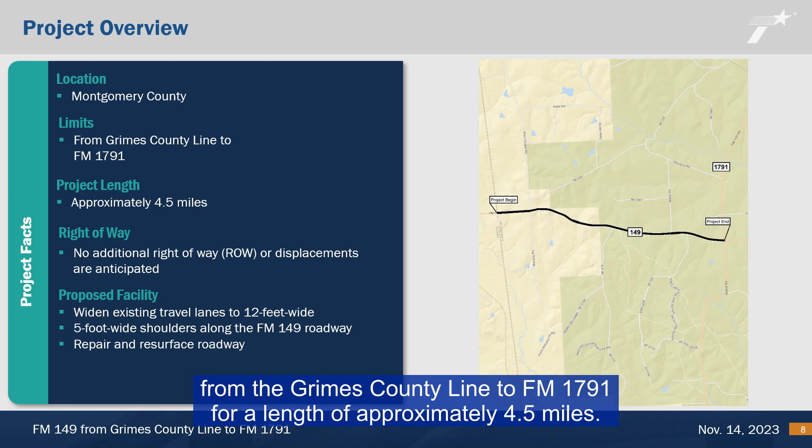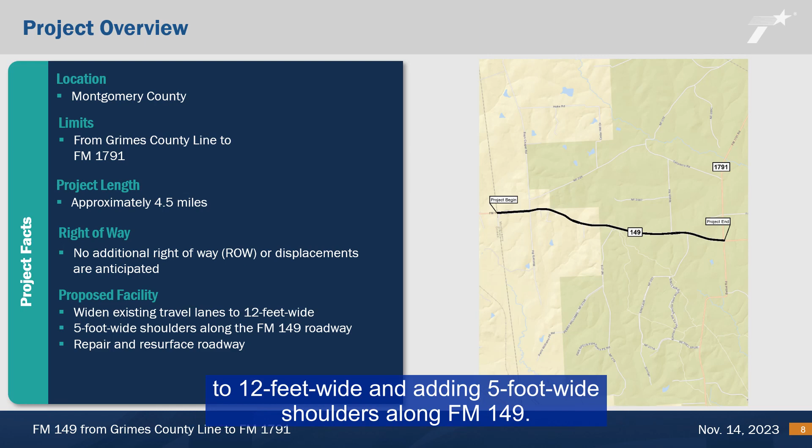The proposed project limits extend from the Grimes County line to FM 1791 for a length of approximately 4.5 miles. The project is located in Montgomery County. Proposed improvements include widening the existing travel lanes from 10 feet wide to 12 feet wide and adding 5-foot wide shoulders along FM 149. The roadway would also be repaired and resurfaced.

On September 27, 1948, the United States Forest Service granted a special use permit to TxDOT. This special use permit is a legal document that allows TxDOT authorization for a specific use of the specified land for an agreed upon amount of time. With the granted special use permit, the United States Forest Service allowed TxDOT to construct FM 149 through the Sam Houston National Forest.

Coordination between the National Forests and Grasslands of Texas and TxDOT began in December 2022 to discuss who would be the lead federal agency for the NEPA clearance of the proposed improvements to FM 149. In May of 2023, TxDOT coordinated with the FHWA and the NFGT to lay out the procedure for the FHWA to issue the letter of consent to the NFGT for the conversion of the SUP to a DOT easement.

To recognize TxDOT as the lead federal agency, and so this project could continue under a TxDOT CE, it was agreed to by the FHWA and NFGT that TxDOT would issue a notice of intent to the NFGT signifying their intent to have the FHWA issue a letter of consent to the NFGT for the conversion of the SUP to a DOT easement. The letter of intent was sent to the NFGT on October 18, 2023.

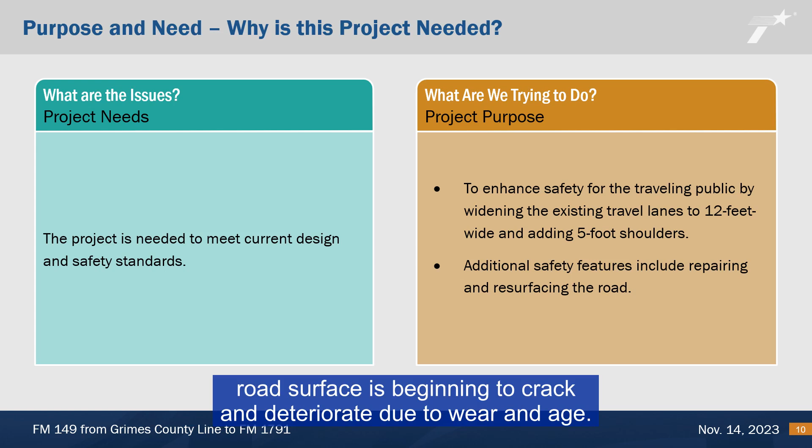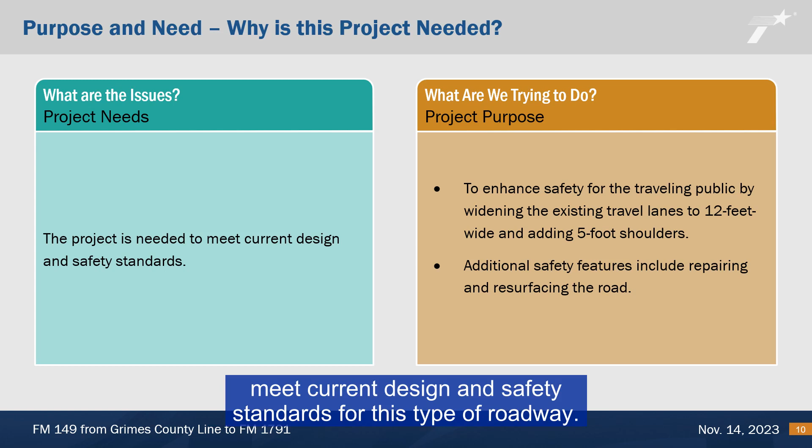The project is needed because the existing road surface is beginning to crack and deteriorate due to wear and age. Additionally, the existing 10-foot wide lanes and the lack of shoulders do not meet current design and safety standards for this type of roadway. The purpose of this project is to address aging infrastructure and to meet current design and safety standards.

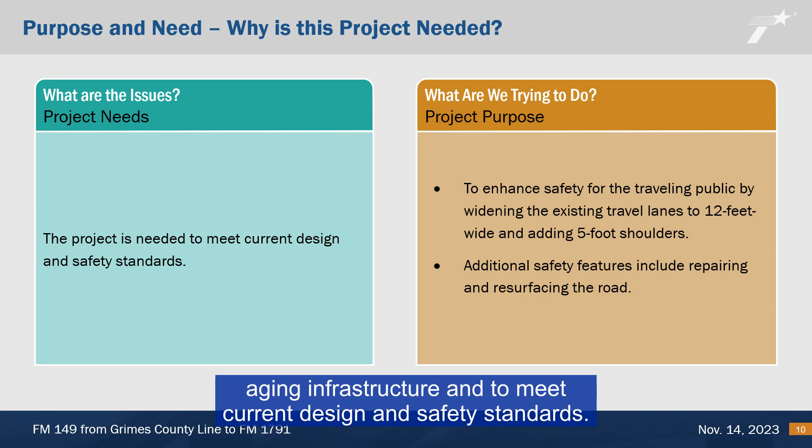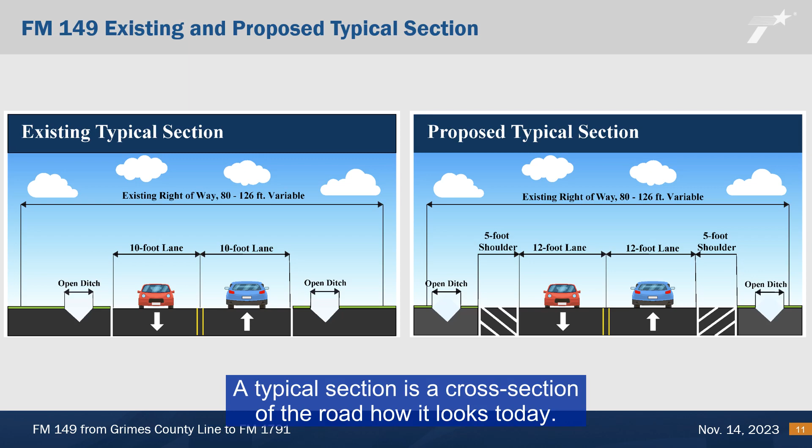Now let's walk through the proposed improvements. This slide includes an illustration of the existing typical section of the roadway. A typical section is a cross-section of the road, how it looks today.

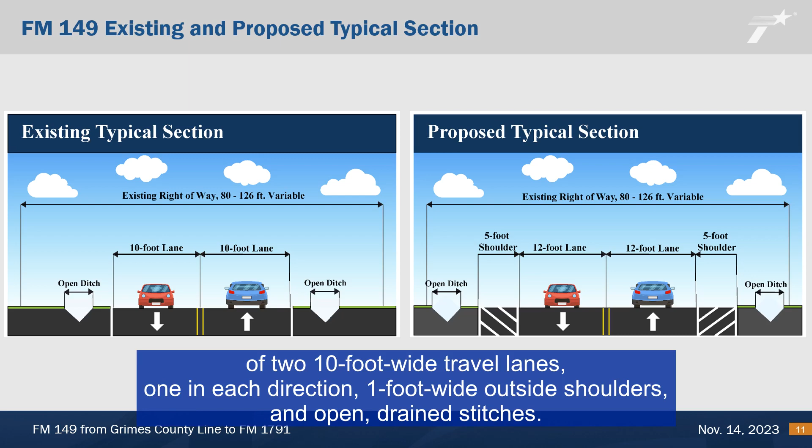Within the project limits, the existing FM 149 roadway consists of two 10-foot wide travel lanes, one in each direction, 1 foot wide outside shoulders, and open drainage ditches. The existing right-of-way is variable and is approximately 80 to 126 feet wide. There are no sidewalks or bicycle accommodations within the existing project area.

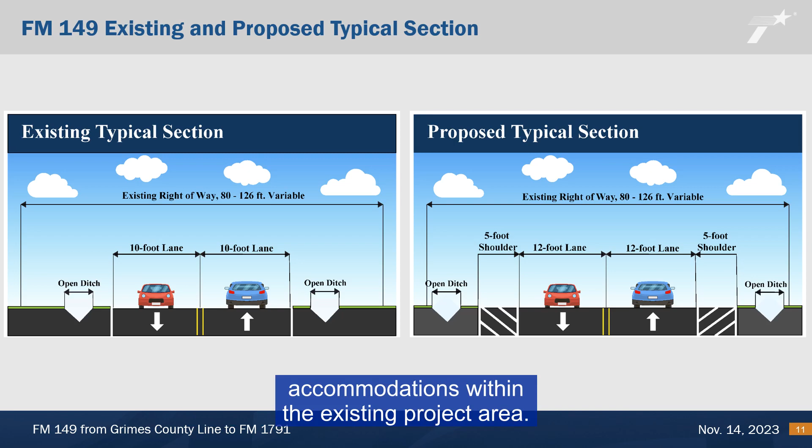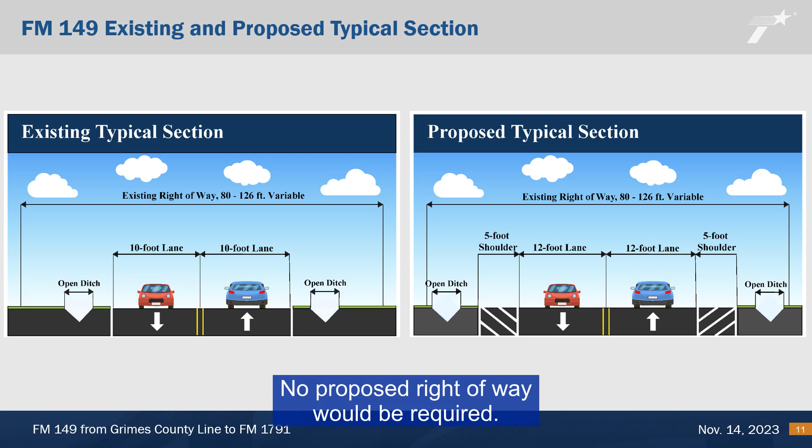The proposed project would widen the existing travel lanes to 12 feet wide and provide 5-foot wide shoulders on both sides of the roadway. No proposed right-of-way would be required.

The drainage analysis showed a need to widen and deepen the existing roadside ditches to accommodate the additional sheet flow from the widened roadway, which would result in the proposed removal of trees. The improvements to the cross culverts due to the required traffic controls and the roadway widening would also require the removal of trees. Approximately 6 acres of trees would be removed from sections of existing right-of-way.

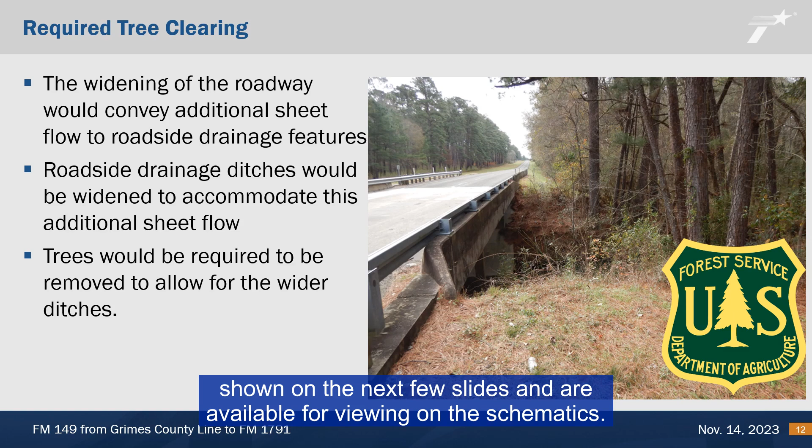Tree removal efforts would be coordinated with the United States Forest Service. The tree removal areas and acreage of trees to be removed from each area are shown on the next few slides and are available for viewing on the schematics.

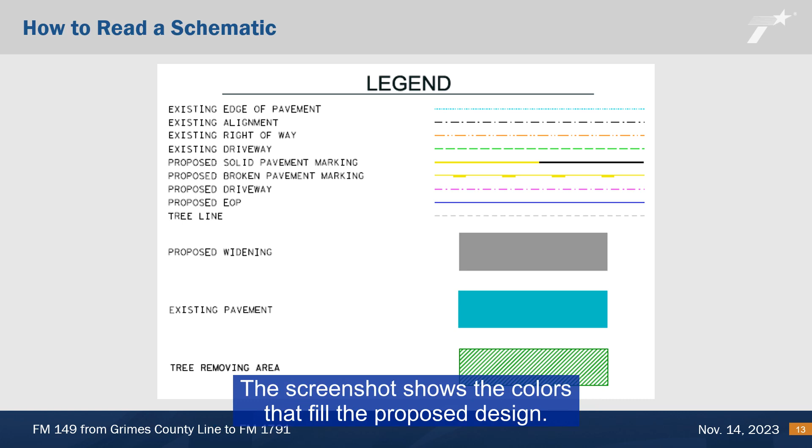Here is a screenshot of the legend on the schematics that you can find on the website. The legend is included on each page of the schematics so you can reference it as you review them. The screenshot shows the colors that fill the proposed design. These colors identify the limits and major aspects of the project.

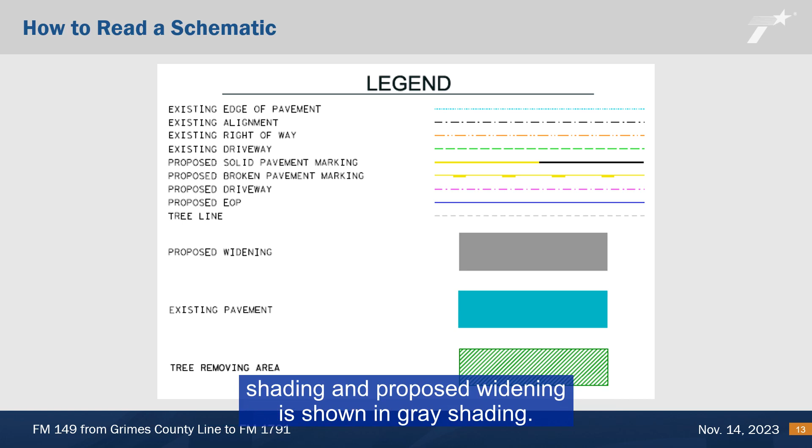Let's walk through them. The existing right-of-way is shown as an orange dashed line. The existing pavement is shown in blue shading, and proposed widening is shown in gray shading. Proposed tree removal areas are shown in green crosshatch.

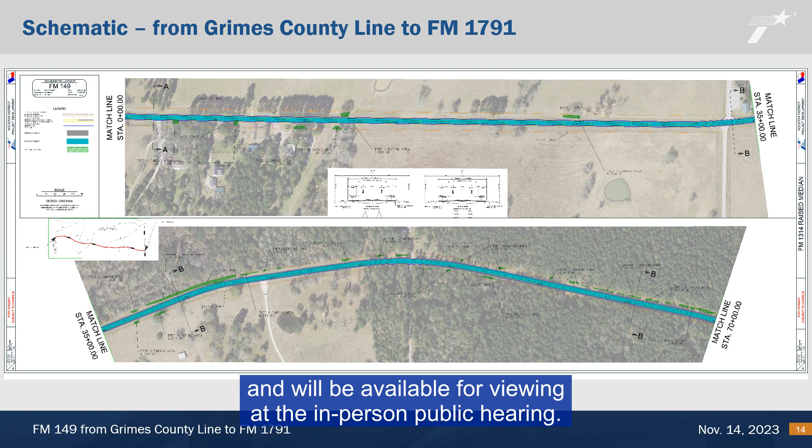Here's a detailed look at a portion of the schematic or design drawing of the project. This slide shows FM 149 at the Grimes County line. A full version of the project schematic can be downloaded from the project website and will be available for viewing at the in-person public hearing.

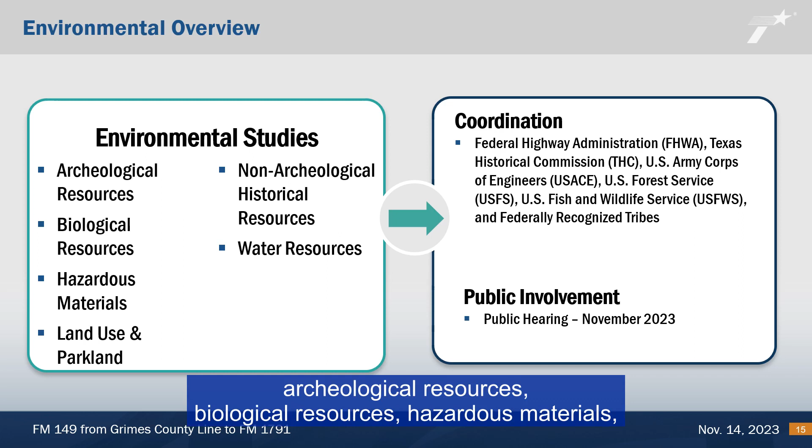The project team is evaluating the potential environmental impacts that could occur as a result of constructing the proposed project. Areas that are under review include archaeological resources, biological resources, hazardous materials, land use and parkland, non-archaeological historic resources, and water resources. The project would be designed to avoid or minimize impacts to the greatest amount practicable. Technical reports documenting the analysis and conclusion of these studies are available on the TxDOT webpage, but let's walk through the findings.

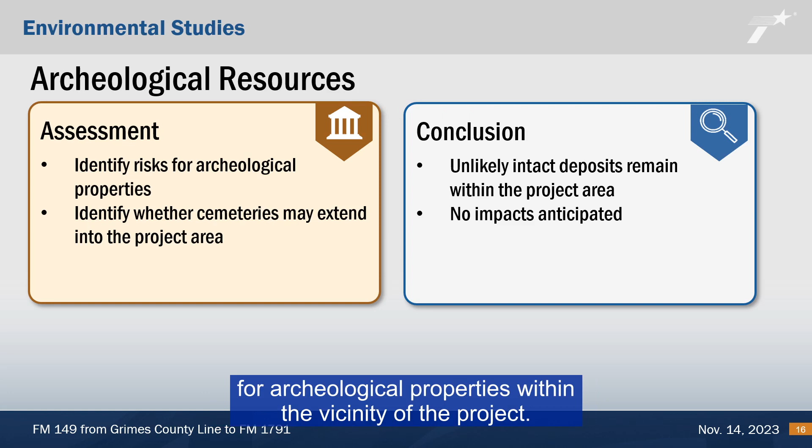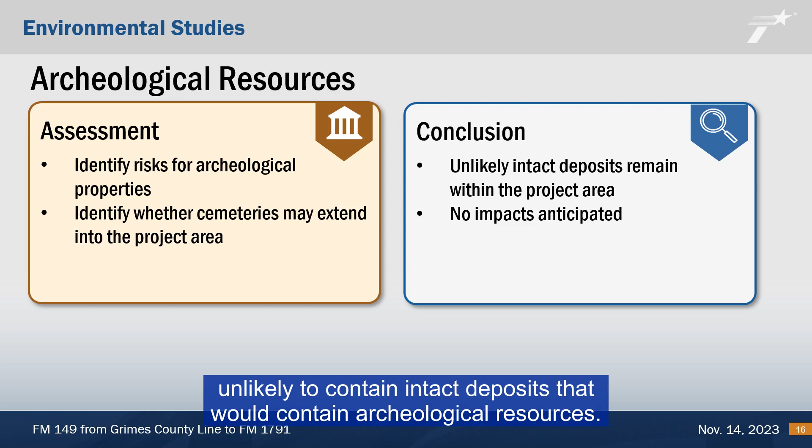An archaeological background study and survey was completed for the proposed project. The purpose of a background study is to identify risks for archaeological properties within the vicinity of the project, and to consider whether any cemeteries may extend into the project area. The study and survey found the area unlikely to contain intact deposits that would contain archaeological resources. Therefore, no impacts are anticipated and no further archaeological investigations are warranted prior to construction activities.

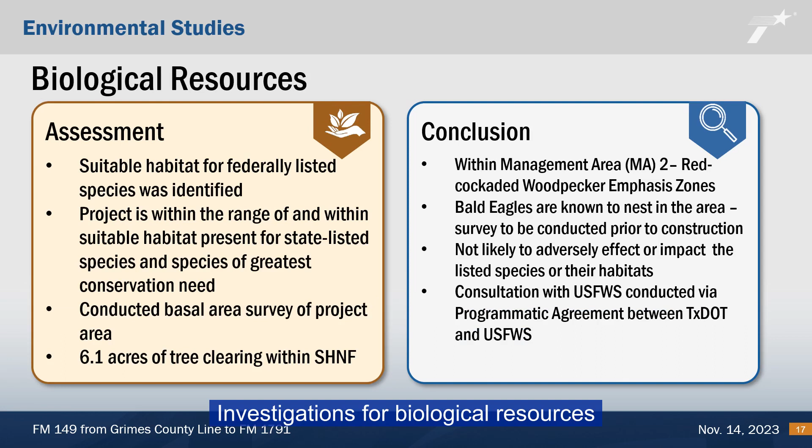Investigations for biological resources were conducted within the project corridor. Biological resources studies include evaluating potential impacts to vegetation, wildlife habitat, and threatened and endangered species. The project area contains habitat for federally listed species and is within range of and within suitable habitat for state-listed species and species of greatest conservation need. The project falls within Management Area MA2 for endangered red cockaded woodpecker emphasis zones.

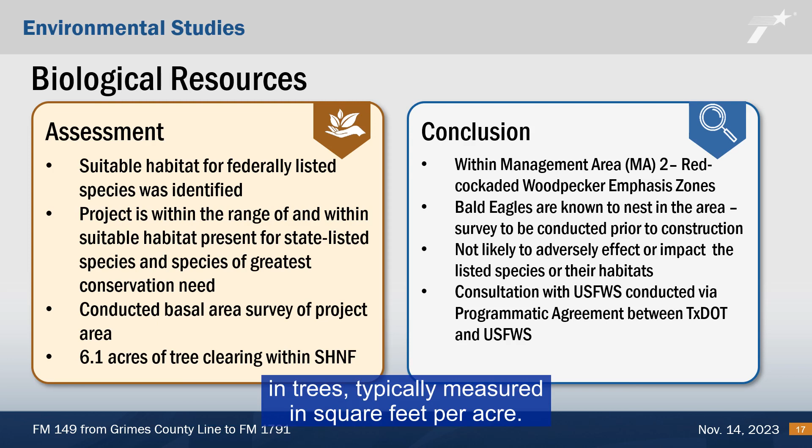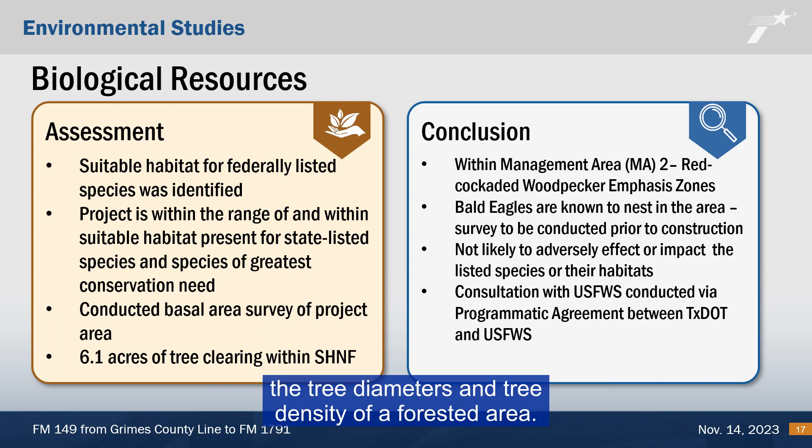Based on the current project design, approximately 6.1 acres of tree clearing within the existing right-of-way would be required during construction. Therefore, TxDOT conducted a basal area survey of the proposed project. The basal area gives us an overall picture of how much of an area is covered in trees, typically measured in square feet per acre. This measurement is an important tool for wildlife managers as it provides the tree diameters and tree density of a forested area.

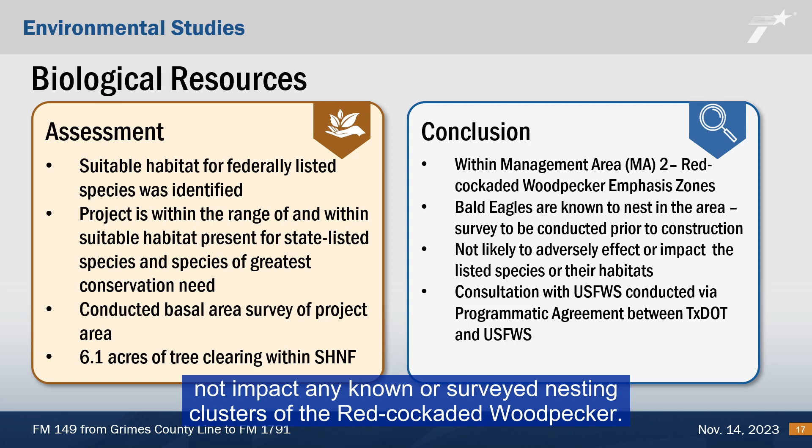Determining the basal area helps us make decisions when managing forests for wildlife that may have specific habitat requirements. The removal of approximately 6 acres of trees along the edge of FM 149 would not impact any known or surveyed nesting clusters of the red cockaded woodpecker. Additionally, the results of the basal area survey concluded that the appropriate density of trees would remain to support the breeding and foraging needs of the species.

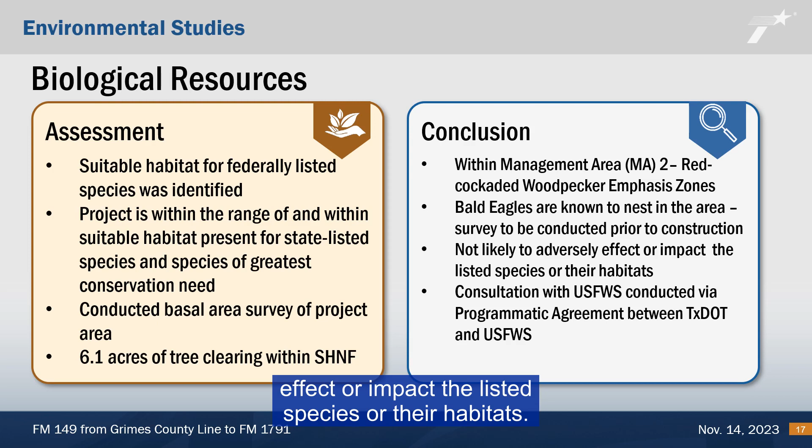Bald eagles are also known to nest in the area. A survey for bald eagles and their nests will be conducted prior to construction. A presence-absence survey conducted on December 8, 2022 found no bald eagle nests in any of the trees anticipated to be removed as a result of this project. The project is not likely to adversely affect or impact the listed species or their habitats. Consultation with the U.S. Fish and Wildlife Service is being conducted via the programmatic agreement between TxDOT and the United States Fish and Wildlife Service.

A hazardous materials initial site assessment was completed to determine the potential for encountering hazardous substances and/or contamination within the vicinity of the proposed project. There are several buried pipelines that intersect the project area. Identification and relocation of pipelines as needed would be addressed during the utility relocation phase of the project in accordance with established procedures.

The proposed FM 149 project area is located adjacent to large parcels of undeveloped piney woods forest and includes some residential areas. A portion of the project is located within the Sam Houston National Forest, which is classified as a publicly owned recreation area and is therefore protected under Section 4(f) of the Department of Transportation Act of 1966 and under Chapter 26 of the Texas Parks and Wildlife Code. Under these regulations, TxDOT must coordinate with the official with jurisdiction, which in this case is the U.S. Forest Service, to determine if the proposed project would adversely affect the activities, features, or attributes qualifying the recreation area for protection under Section 4(f).

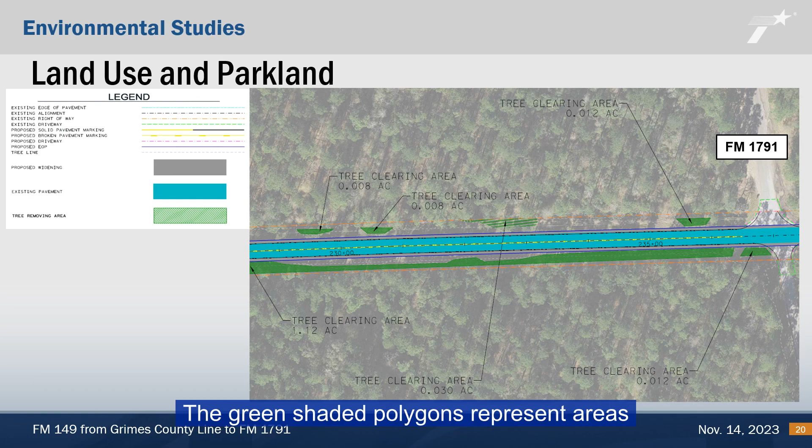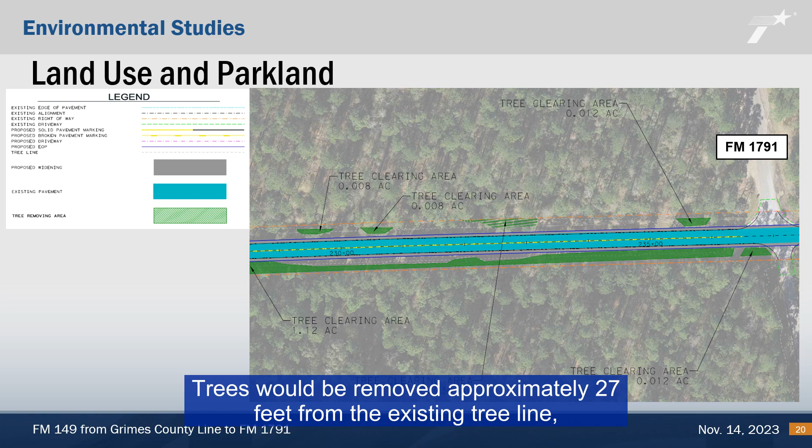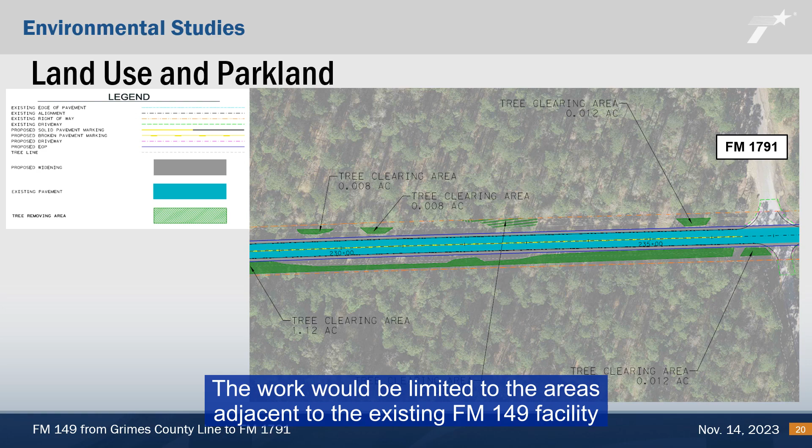This image illustrates a portion of FM 149 near FM 1791. The green shaded polygons represent areas of required tree clearing within the existing special use permit area. Trees would be removed approximately 27 feet from the existing tree line, accounting for a total of approximately 6.1 acres. The work would be limited to the areas adjacent to the existing FM 149 facility and remain within the special use permit area granted to TxDOT.

No historic age resources constructed prior to 1978 were identified in the study area. No districts or properties are recommended eligible for listing in the National Register of Historic Places as a result of historic resources surveys.

8 streams and 1 potential wetland were identified within the project corridor. The proposed project work is anticipated to be covered under a U.S. Army Corps of Engineers Nationwide Permit 14 with pre-construction notification.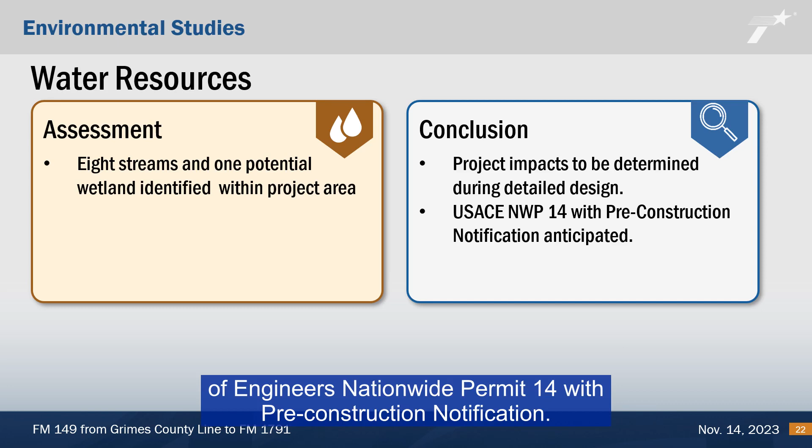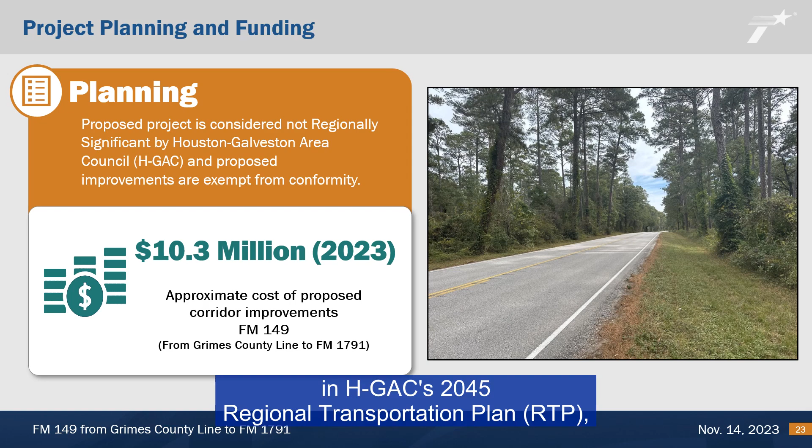The proposed project is federally funded as a maintenance-type project to improve the existing roadway. The proposed improvements are exempt from conformity, and the project is considered not regionally significant by the Houston-Galveston Area Council, HGAC. Therefore, this project is not listed in HGAC's 2045 Regional Transportation Plan, RTP, and the 2023 through 2026 Statewide Transportation Improvement Program, STIP. The approximate cost of proposed improvements is $10.3 million.

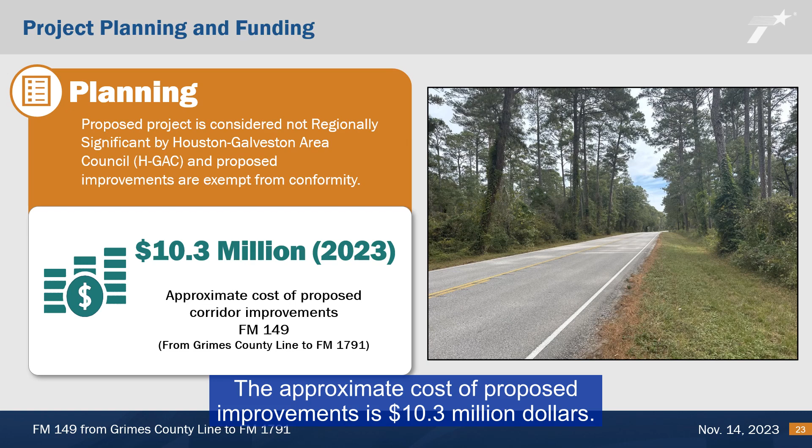No additional right-of-way would be required for the proposed project. No potential impacts to residential or commercial properties are anticipated. The FM 149 roadway is currently under a special use permit granted to TxDOT from the U.S. Forest Service. TxDOT is currently working to convert the special use permit to a Department of Transportation easement prior to construction.

This public hearing is being held to present the proposed project, including the proposed design and the associated environmental technical reports, and to gather public and stakeholder input. After the comment period closes, the project team will review the comments received, make appropriate design modifications, and prepare the public hearing documentation. The public hearing documentation will be posted to the project webpage when prepared.

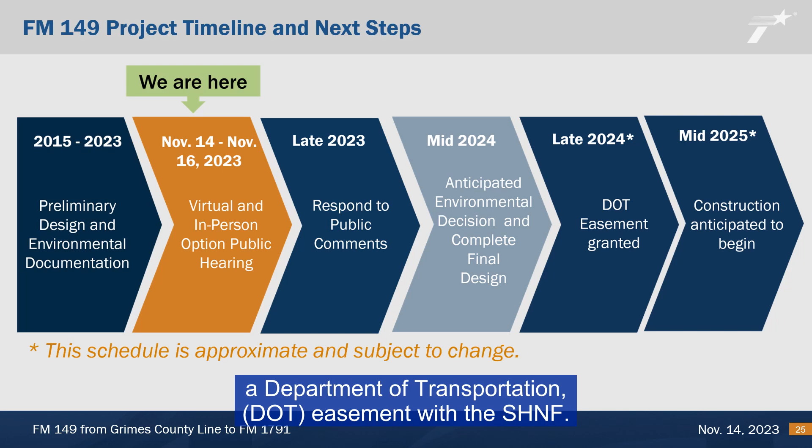The next steps include refining the design based on comments received from the public and updating the environmental documentation with those design changes. TxDOT is currently working to execute a Department of Transportation (DOT) easement with the SHNF. After the easement is executed, construction is tentatively scheduled to begin in the summer of 2025. This schedule is approximate and subject to change.

The project website contains all materials presented in this public hearing, including this presentation in both English and Spanish, the proposed schematic, exhibit boards, environmental technical reports, a project fact sheet, and a comment card in both English and Spanish. The schematic design provides a more in-depth look at details for the proposed project and is available for viewing at the public hearing. The proposed schematic design files are large and may require more time to download than the other project materials.

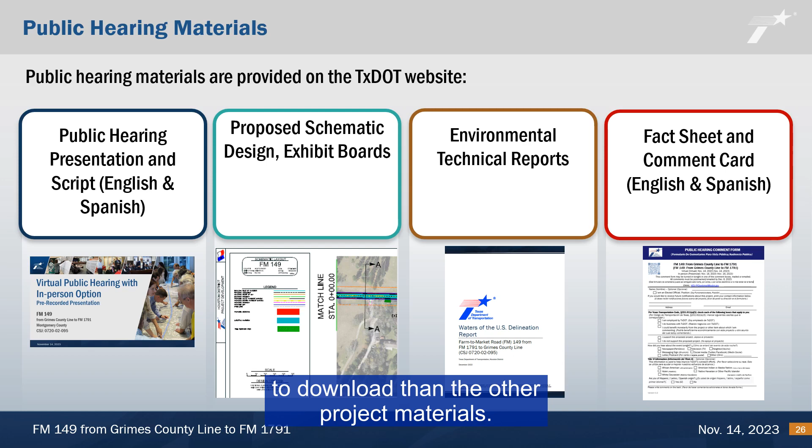TxDOT encourages you to review the materials posted on the project website and to provide verbal or written comments. You may submit comments in the following ways. By phone, call the project phone line at 936-228-9859 to leave verbal testimony. On a comment card, download the comment card from the project webpage, www.txdot.gov/projects/hearings-meetings.html. At the in-person hearing, fill out the comment card at the public hearing and drop in the comment box.